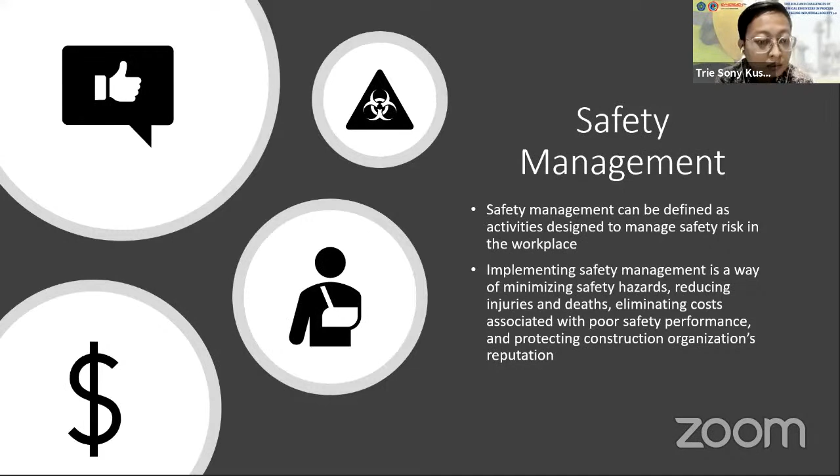Okay, I will show you data in Indonesia. This is the data of accident cases that happened in Indonesia in all kinds of industry in the last decade, from 2011 till 2020. As we can see here, almost every year there is an increase in accidents, except for 2016. An interesting fact is when the COVID-19 pandemic happened in 2020, a lot of industries were actually stopped or delayed for a while.

But as we can see here, the accident cases actually increased by a lot, more than 30,000 increases from 2019. This leads to a bigger question: what happens here? There is a probability that our safety management is lacking.

Next, let's talk about the contributors of accident cases that happen in Indonesia. The biggest contributor is actually the construction industry with 31.9%, followed by the manufacturing industry with 31.6%. This doesn't happen only in Indonesia, it also happens worldwide. Construction industry in a lot of other countries also becomes the biggest contributor of accident cases, even in developed countries such as the United Kingdom and the United States of America.

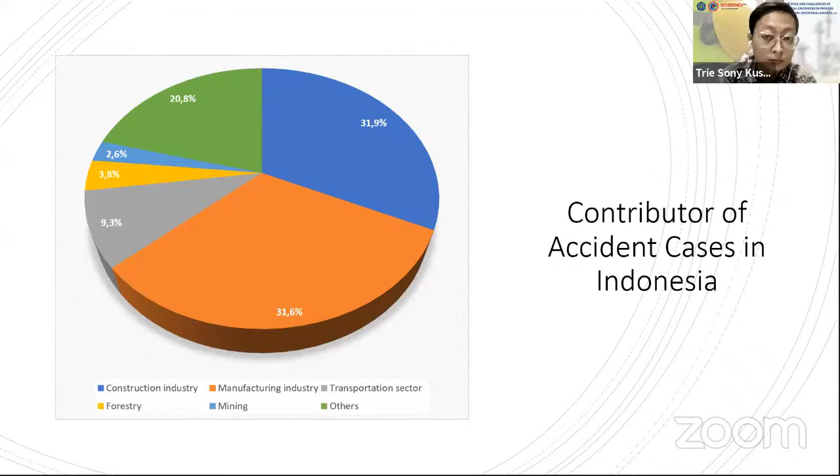This leads us to the biggest question: why does the construction industry become the biggest contributor of accident cases? Okay, why did this happen? Why does the construction industry become the biggest contributor of accidents?

The first reason is lack of knowledge about health, safety, and environment in the project workers' community. This usually happens to bottom-level workers like unskilled labor, but sometimes even skilled workers like engineers also don't have any knowledge about health, safety, and environment. Maybe they don't have any training or education about health, safety, and environment.

The second is lack of attention in current health and safety implementation. The top management, like the project manager, usually already has knowledge about safety management, but the problem is they don't give enough attention to it because they have other priorities such as productivity and profit. The third is unsafe work culture.

This happens a lot in developing countries such as Indonesia and many countries in Southeast Asia, the Middle East, Africa, and South America. For example, in some countries workers still think it is fine to not wear any safety equipment, such as a harness, when working in high places, and it becomes the norm there. They only wear safety equipment when there is a supervisor.

The last reason is lack of control on health, safety, and environment implementation. In construction projects, especially big ones, there usually will be a lot of workers, hundreds or even more, on the construction site. Because of that, it becomes harder to control or supervise each one of the workers.

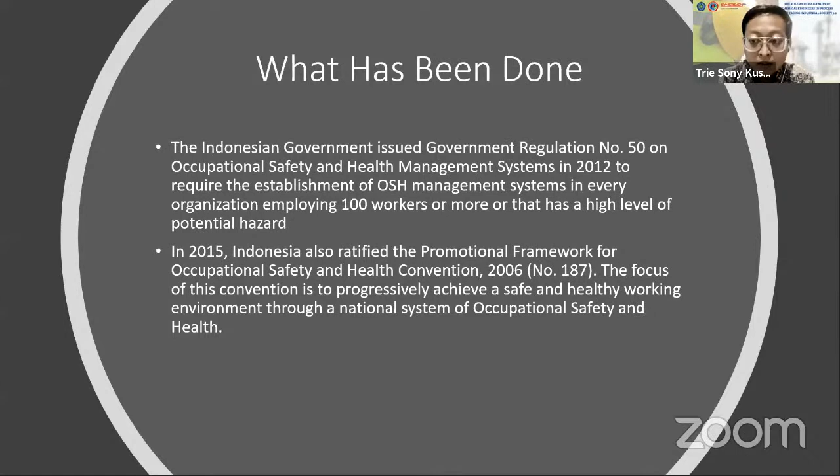Now we know that the government already tried to improve the safety of the construction industry, but the question is, does it work? Let's take a look back at the previous chart that I've shown you.

After the government issued the government law in 2012 and ratified the Occupational Safety and Health Convention in 2015, the number of accidents actually kept on increasing. It even became worse in 2018. This makes us question why it doesn't work.

The same strategy of making policies for occupational safety and health has actually been done in other countries, for example in Australia, and it led to a decrease in accident cases. So why doesn't it work here in Indonesia?

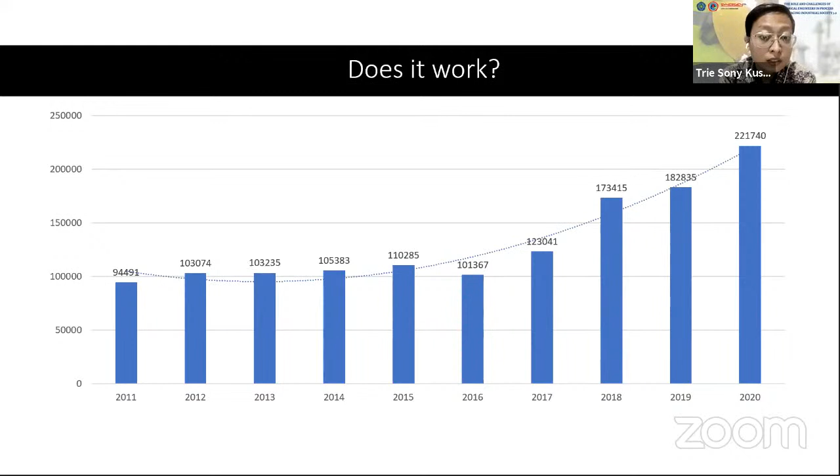The answer is about safety climate. A research study done in Indonesia shows that Indonesia actually has a lacking safety climate.

So I've been talking about safety climate, but what is safety climate? Safety climate contains three interrelated dimensions. The first is about the behavioral aspect, or what people do, which includes the safety-related activities, actions, and behaviors exhibited by the employees.

Second is about the situational aspect of the company, or what the organization has. It is reflected in the organization's policies, work procedures, management systems, control systems, and communication flows.

The third is about the psychological characteristics of the employees, or how people feel, corresponding to the values, attitudes, and perceptions of employees with regard to safety within an organization.

There are 6 key factors of safety climate. The first is management commitment. It's about whether the project manager considers the safety of employees as his or her top priority, or just some lip service to make the worker happy.

Second is about communication. Does the project manager socialize the health and safety program in a good way? Good communication will lead workers to pay attention to safety, but bad communication will make them ignorant of safety.

Third is about rules and procedures. Have the rules and procedures been made to improve the safety of the worker, and are the rules and procedures easy to understand by everyone, including the worker?

Okay, thank you. Hello everyone, good morning, hope all of you are doing great. Today I become one of the invited speakers. My department is mechanical engineering, and let me share my screen first. Okay, wait a minute. Okay, now you can see my screen.

The first time I saw this, there is a combination between chemical, mechanical, and also safety — three topics combined together. So in the beginning of the talk, what kind of specific topic can combine all of them? Then I thought of things we can find or meet in our daily life, such as automobiles, cooking on a stove, or even bigger industrial processes such as a furnace for melting metal, and other aspects like using fire as a common process.

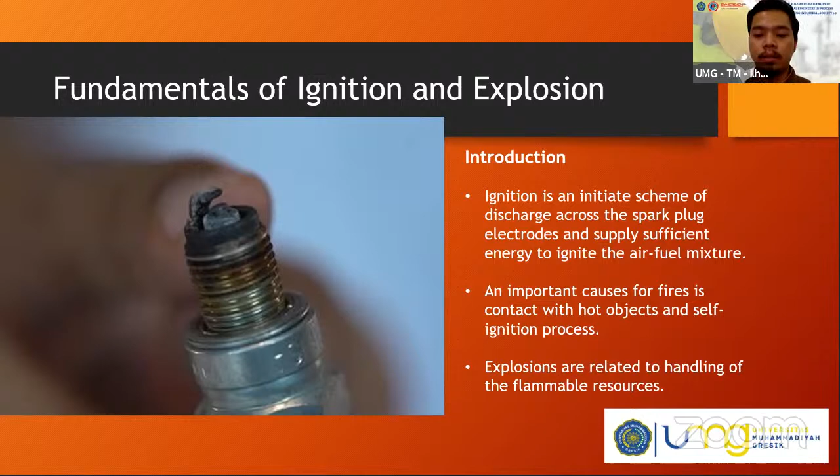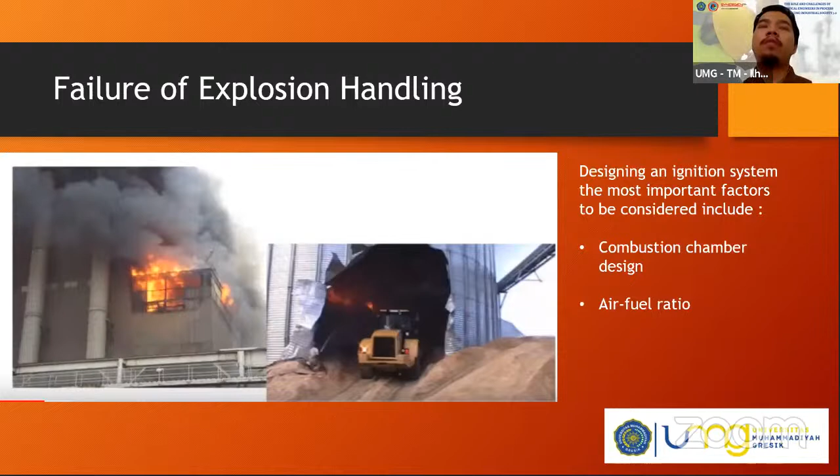Before going into the deep design, we have to know the background or small knowledge about fire itself. Fire can actually happen if there are three elements: heat, fuel, and oxygen.

But we also have to make sure there's a chemical chain reaction, because without a chemical reaction there will be no fire. For example, methanol or ethanol doesn't react with the air even with heat present, there will be no flame in reality. So we have to know there are 3 or 4 elements: heat, oxygen, fuel, and the chemical reaction.

The fire triangle was changed to a fire tetrahedron. Before it was a triangle, but now we know there is a new term: the chemical reaction. So we call it a tetrahedron to reflect these 4 elements: oxygen, sufficient heat to raise the material to its ignition temperature, fuel or combustible material, and last but not least, the subsequent exothermic chemical chain reaction in the material.

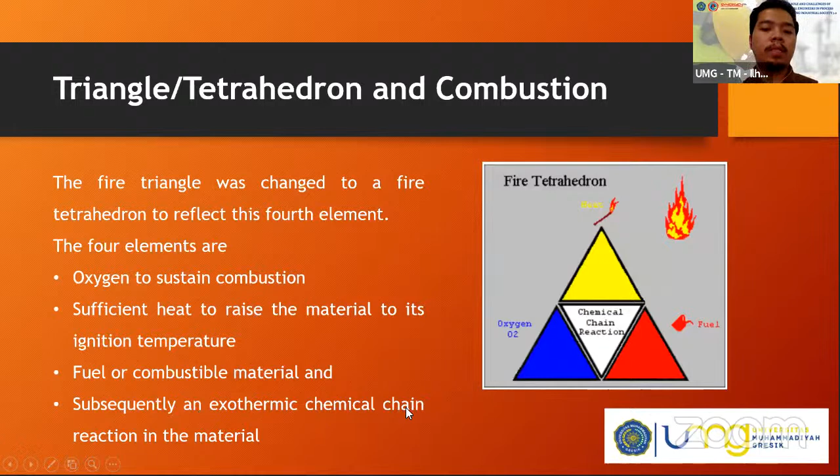These fire elements could be burned if they are in the same place, which we call the combustion chamber. In an automobile, there is a combustion chamber with a piston and crankshaft that is driven by the explosion of fuel and air.

The combustion process can be divided into 2 modes: the first is flaming, where there is a flame, and the second is non-flaming. This is like in the industrial metal field, where hot metal has a high temperature but is not burning. When it's hot, it becomes yellow or shines with a radiance, like yellow or red. This is non-flaming, but it can trigger a flame.

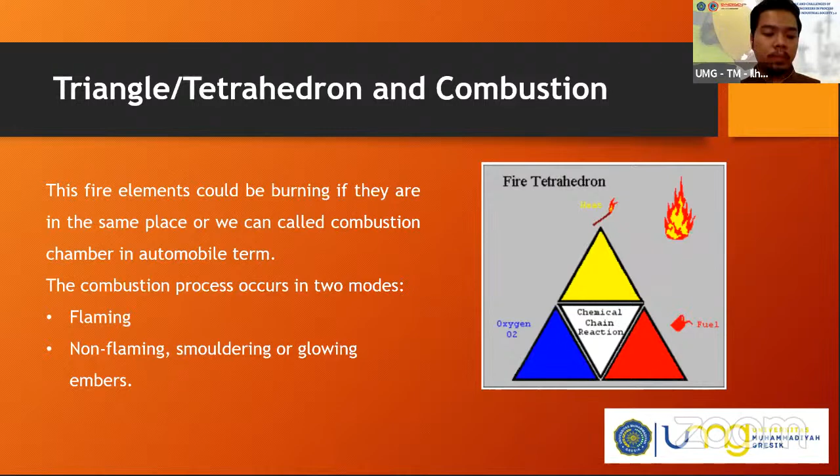We also have to know the term explosion. It's like a balloon - if you have met a balloon, you can find it everywhere. The balloon has pressure inside it. When we pump the balloon with air and break it, there will be a blow, or we can say it explodes, because there is a gap between the pressure inside the balloon and the pressure outside, or the environment.

So imagine if there's fire inside the balloon, or something like dust, or the pressure of hot air. It will grow if the heat rises. If the heat inside the combustion or the balloon is rising, the volume gets bigger and bigger, and then it will reach the ability limit of the thin layer of the balloon, which can then break.

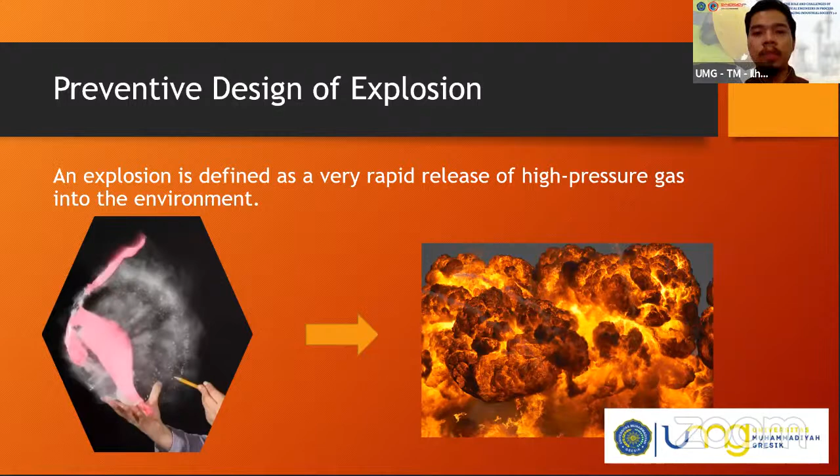So now we know the term explosion. What we can do after knowing the elements of fire is understand that if the fire rises up in a chamber and cannot compensate for the pressure inside, it will explode.

It's very easy to control the fire in the explosion. We have to maintain the four factors to become controllable, such as in the automobile, we have the carburetor. The carburetor itself separates both the air and the fuel, since air is the oxygen and the fuel is the fuel. They're separated into two areas, and after the suction of the piston, the air comes inside to the combustion chamber. Also, the carburetor itself can suck up the fuel by design of the venturi, a neck shape to make sure the fuel inside also sucks up together with the air. This is also a controllable unit.

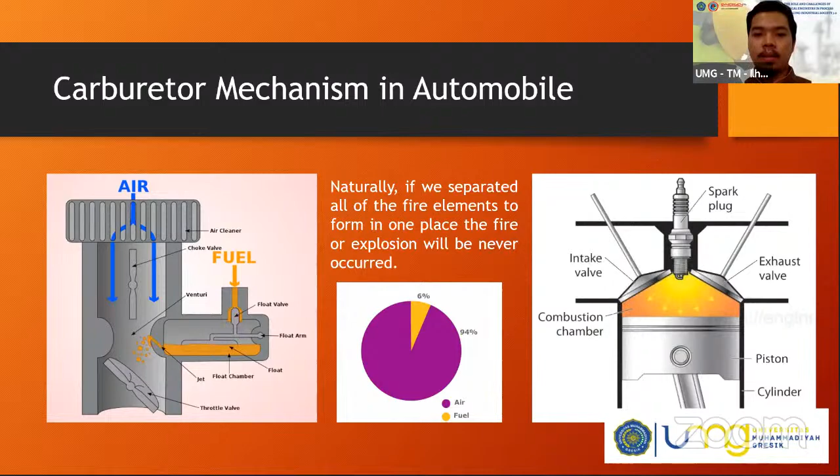So basically, we can design and control the fire. We can control the explosion by calculating the air, calculating the fuel, designing the shape of the chamber, and designing a lot of factors we can choose.

And finally, the LPG regulator also has the same strategy or design that makes sure there is no fire back from the stove to the LPG chamber.

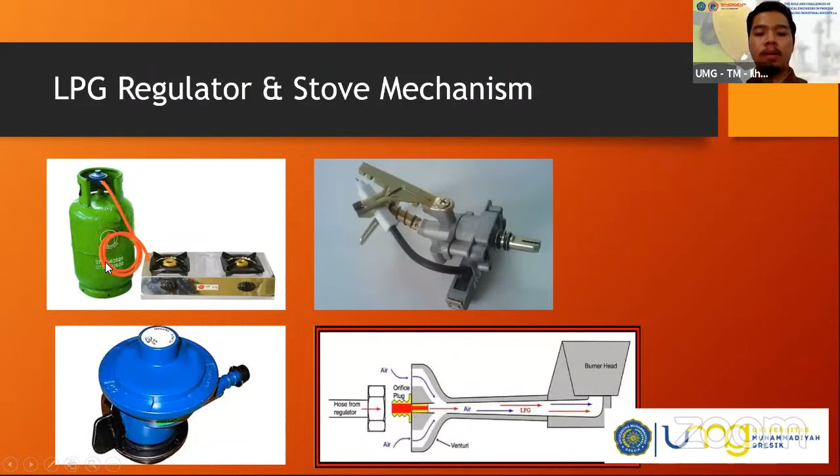So we finally come to the conclusion that both fire and explosion are basically hazardous phenomena. They can lead to catastrophic effects on the environment. Yet by correct handling, we can achieve benefits from them for our daily life. Preventive action could be done by designing the mechanism of handling fire and explosion, such as the carburetor or the regulator, which calculate the characteristics of the four elements of fire. Last but not least, extinguishing action could be done by a fire extinguisher to remove one or more elements of fire.

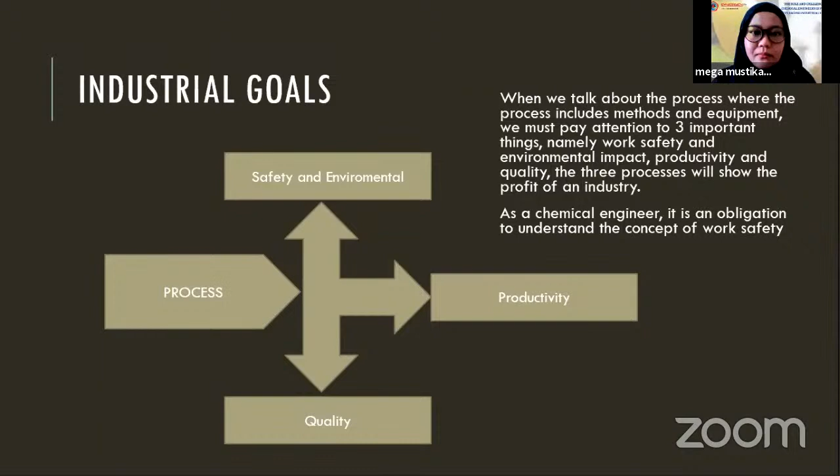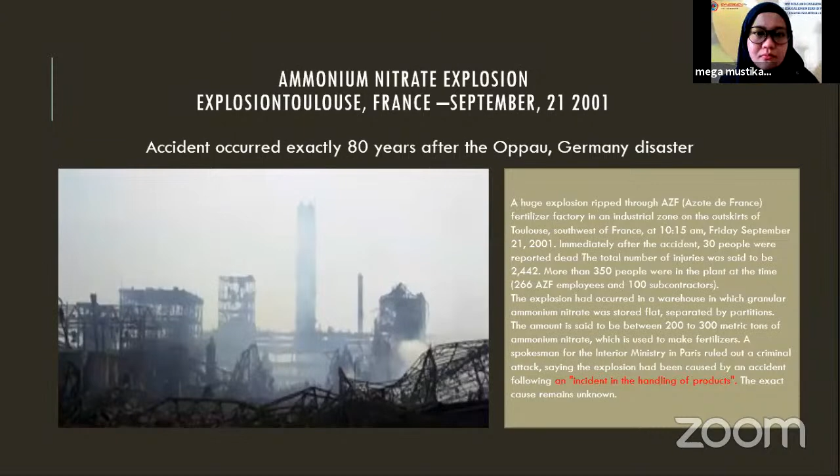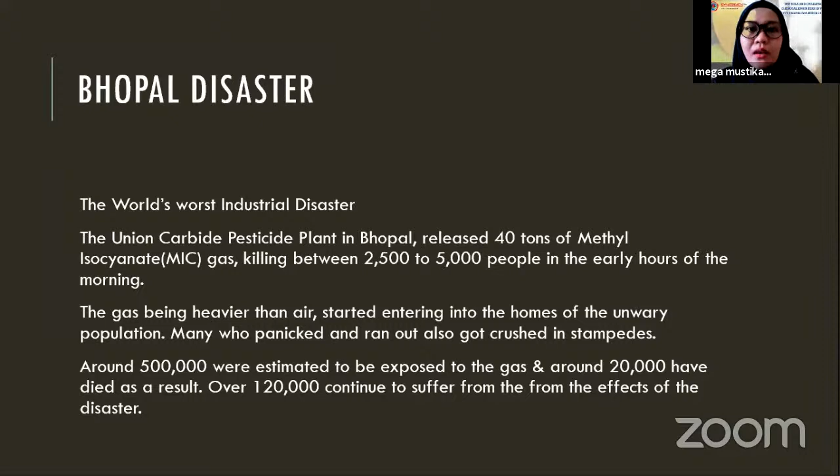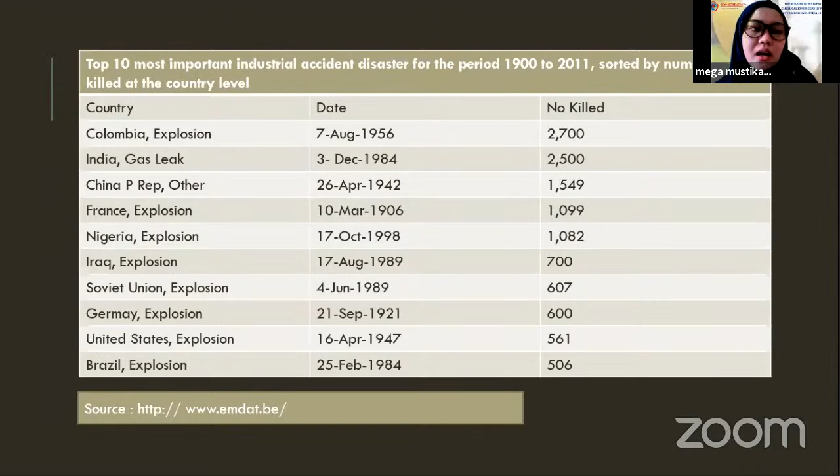As a chemical engineer, we must be observant to see the potential danger that may occur.

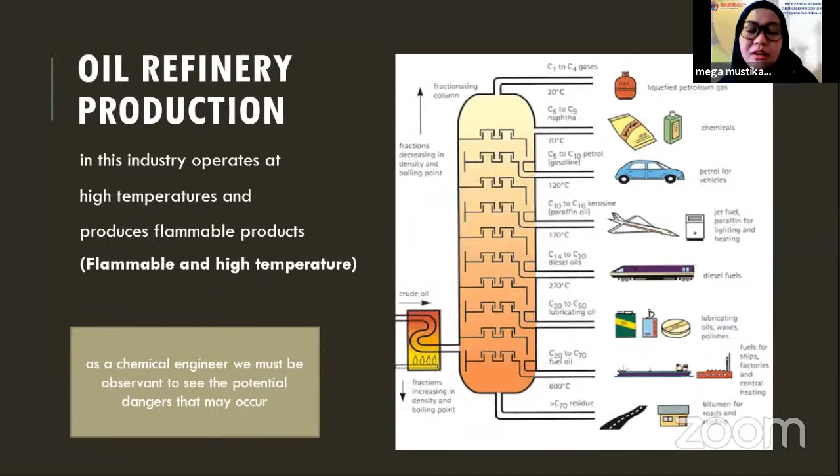For example, we have oil refinery production. This industry operates at high temperature and produces flammable products, so it is a flammable and high temperature industry. We also have ammonia and urea production, where there is a possibility of explosion caused by gas production and use at high temperature in the operating system.

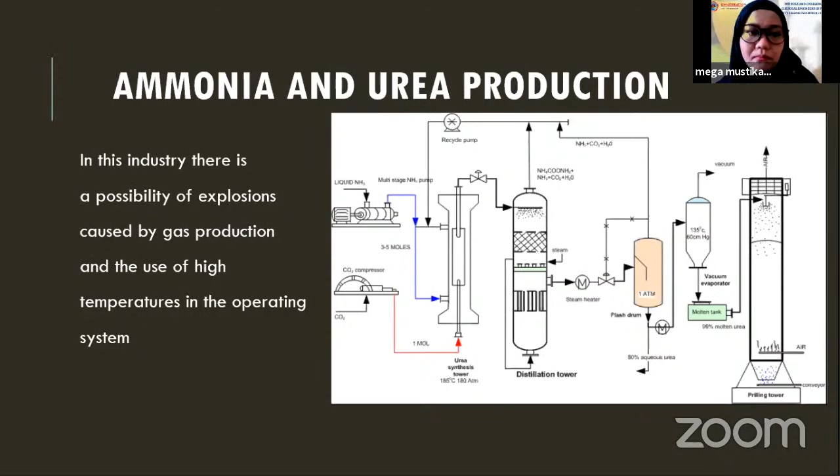So these are the potential hazards usually found in a chemical industry: first, chemical exposure, then poisoning by toxic material, fire and explosion due to flammable gas, fire and explosion due to flammable liquid and solid, explosion caused by pressurized gas and liquid, and fire and explosion due to uncontrolled reaction.

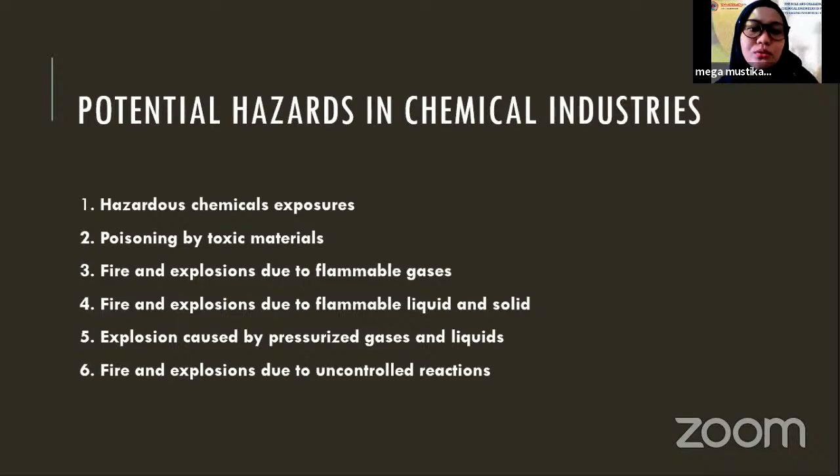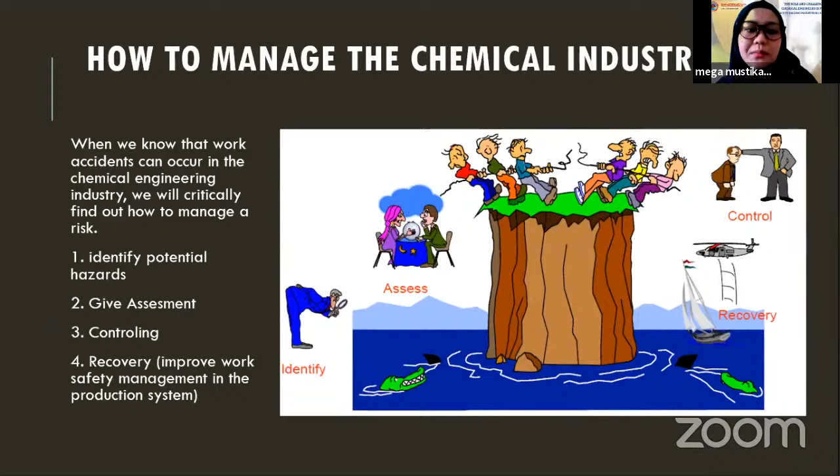So, to manage the chemical industry, when we know that work accidents can occur, we will critically find out how to manage the risk. First we must identify the potential hazard, then give an assessment of how the potential hazard may occur, then we must do controlling, and last we must do recovery. So we must improve work safety management in the production system.

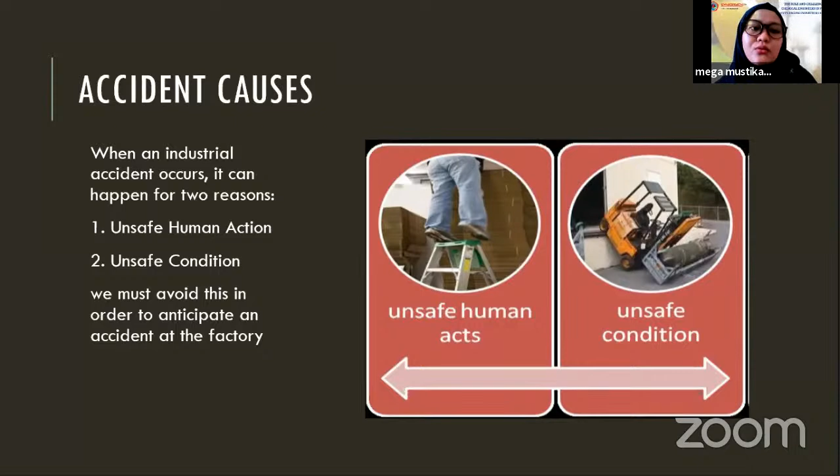Now this is the accident causes. When an industrial accident occurs, it can happen for two reasons usually: unsafe human action, and unsafe condition. We must avoid these in order to anticipate an accident at the factory.

So this is the accident sequence. What is the hazard? Hazard is a condition or action that has the potential for an unplanned release of or unwanted contact with an energy source that may result in harm or injury to people, property, or the environment.

Based on this picture, we can conclude that to avoid the accident that arises due to a hazard, we usually add a barrier to prevent an accident at work. For example, we have pressure or safety relief, a high temperature cut-off switch, or we do the correct and valid operating procedure.

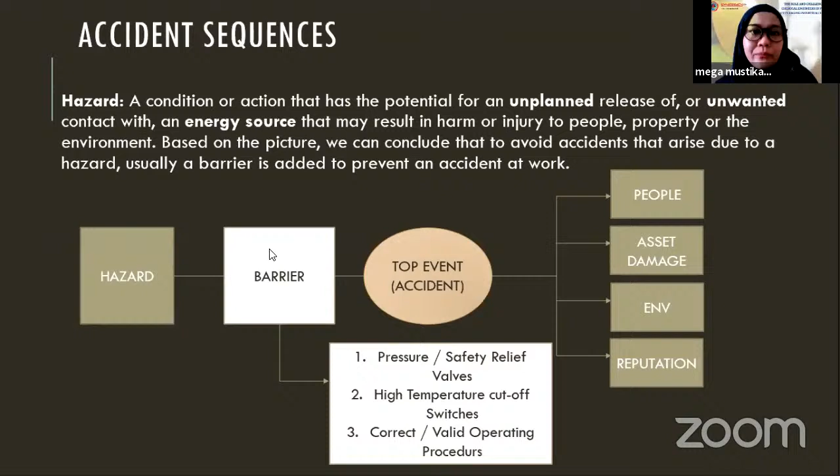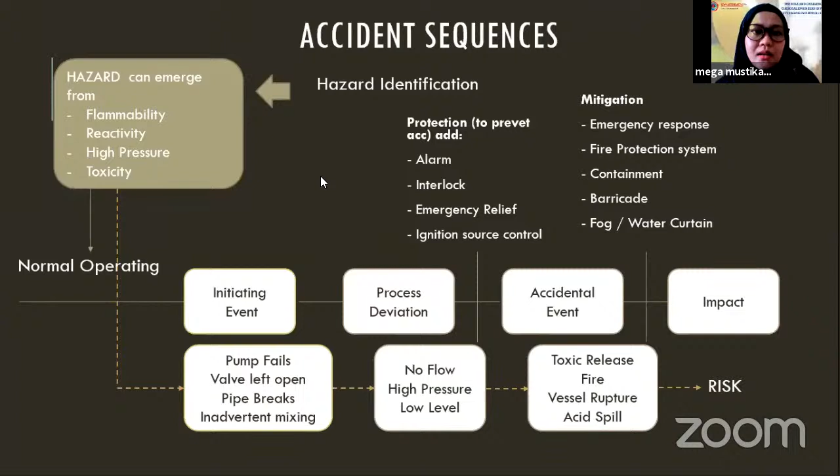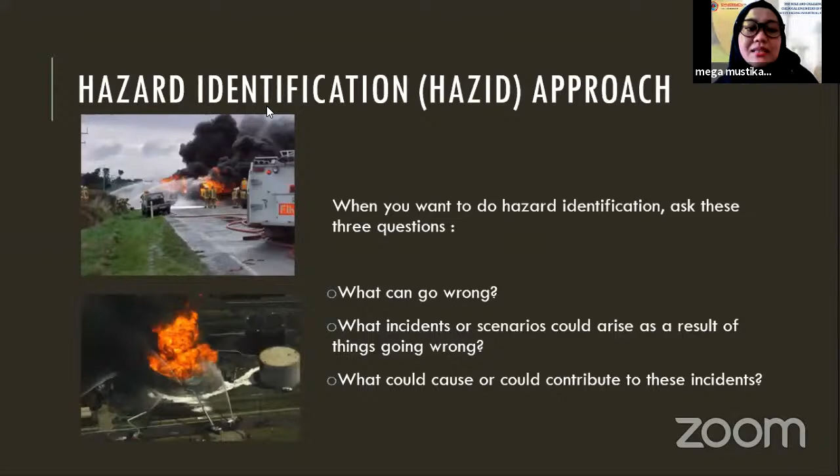We also have to consider the past, present, and future condition. For example, in the past or historical condition, we can ask what has gone wrong in the past, looking at historical records, process experiences, and near misses. For today or existing condition, we can ask what could go wrong currently, and we can do a hazard workshop, hazard study, scenario definition, or checklist.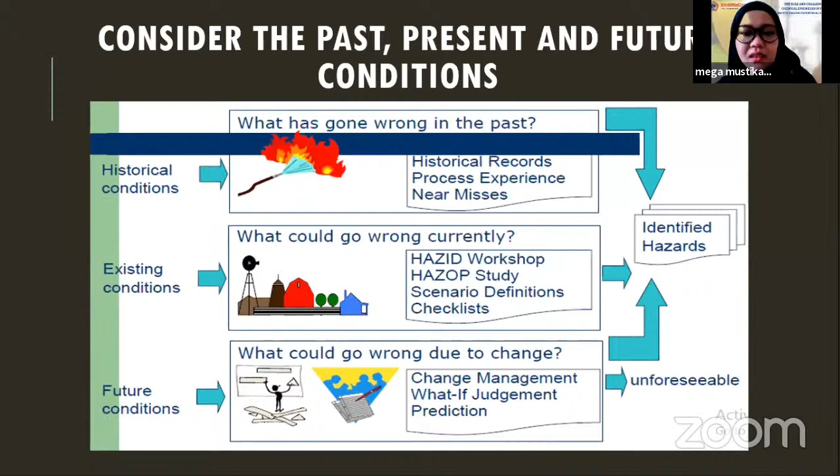And in a future condition, we can ask what could go wrong due to change. We can do change management, what-if analysis, judgment, or prediction of the accident that may occur.

This is an example of a checklist. A checklist is a set of questions to assist in hazard identification, where you check yes or no on a paper sheet, for example for a vessel or a pump. This is useful in early analysis to check within a project.

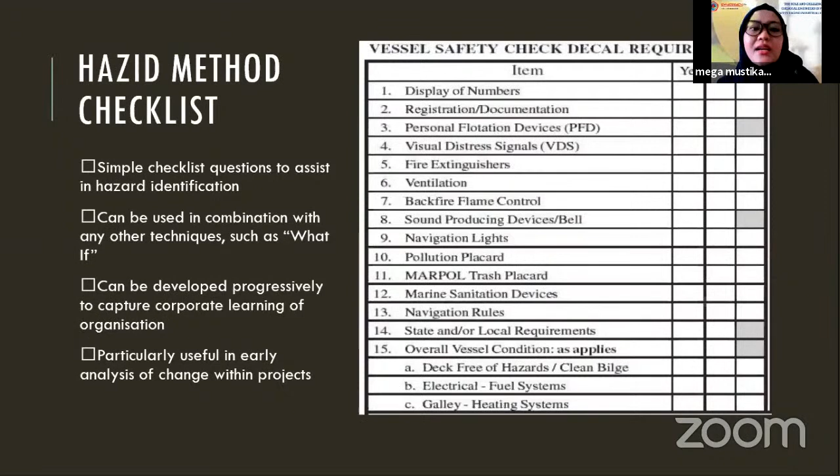Then we have what-if analysis. This is an early method to identify hazards, and it's a powerful method if the analysis staff is experienced. This is an example of the paper sheet.

For example, this is a what-if analysis for piping. We ask what if the piping leaks, then write down the consequences, the probability of occurrence, and the level of severity.

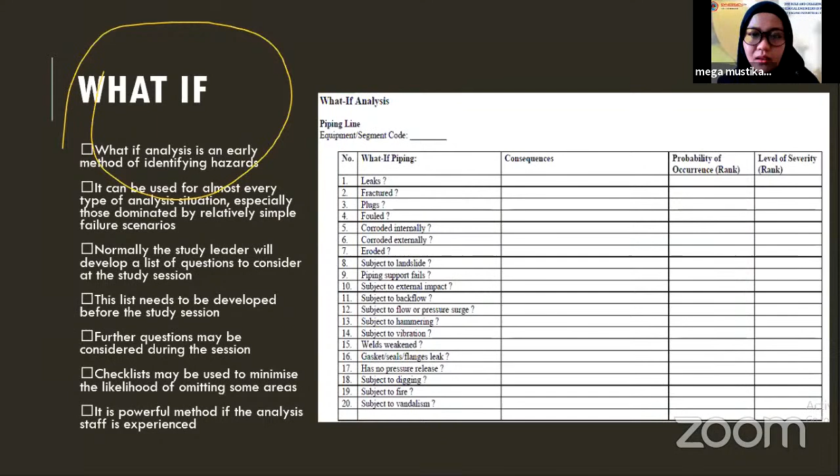And then this is the last FMEA. This is a systematic method in order to evaluate the ways the equipment can fail or be improperly operated, and the effect this failure can have.

So we have an example in a paper sheet. We can write down the component description. For example, we have a pressure safety valve, and then we can write what is the failure mode. Sometimes pressure safety valve have blocked or leakage or broken, and then we must write what is the effect, like for example over pressure, reaction runaway, etc. And we can have the conclusion.

So what is the safeguard? Like a periodic checking or good maintenance or good design, etc. And then we can also write how about the action, repair or replace, etc. You can do anything for your equipment.

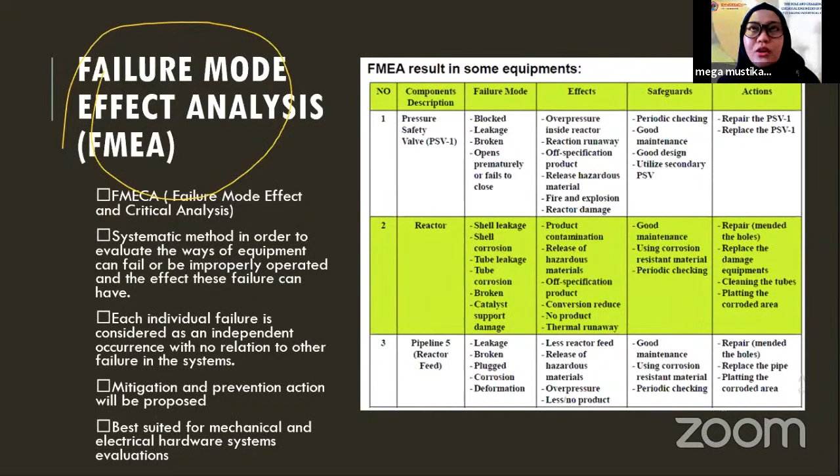In chemical engineering we also have the picture beside that shows the potential danger in various aspects, and this picture will make it easier to find potential hazards that may occur in various industrial tools. For example, in piping, we have high pressure we can find in the piping, and in lighting issues we have effect of radiation, etc.

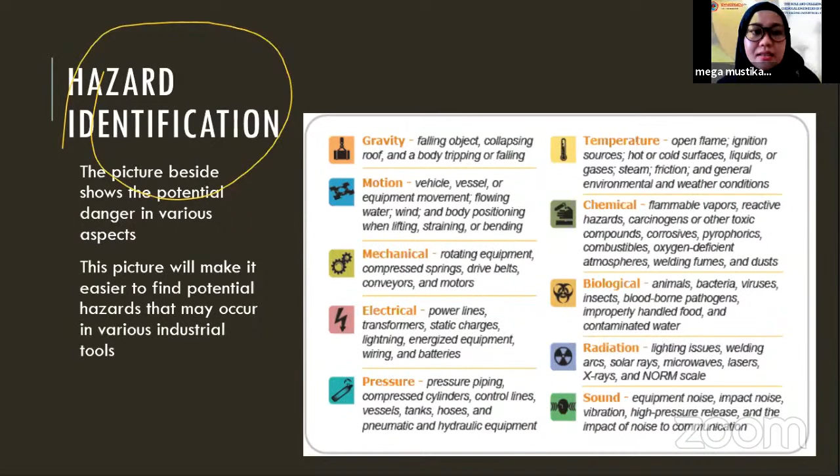In chemical engineering, we have a material safety data sheet or MSDS, and the MSDS provides information on appropriate procedure for handling, storing, and disposal of the chemical after use in laboratory or in factory.

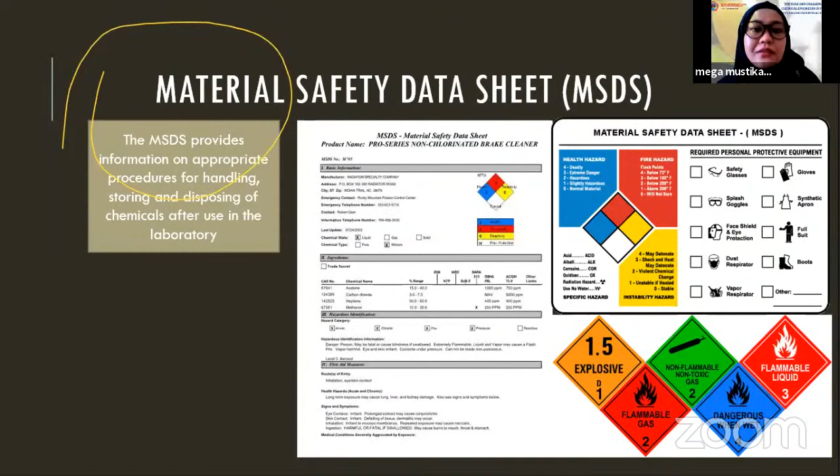And this is the figure of the PFD. So every tool operated in a factory is equipped with an instrument. In this figure, we can find the flow indicator control and other instruments like temperature control, level control, and pressure control, to measure certain parameters according to operating condition that must be monitored at all times to avoid the accident.

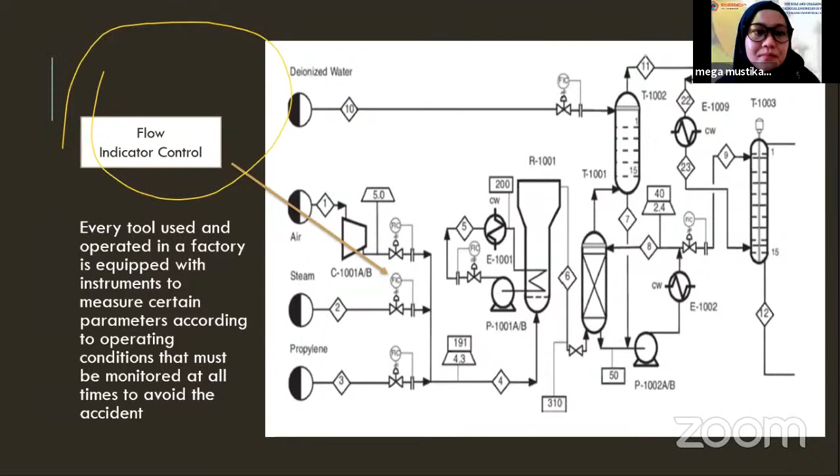And the second guard, we have a critical alarm, we have operator supervision or manual intervention. In the third, we have planned emergency response, and then we have the safety interlock system and emergency shutdown. In the fourth, we have physical protection like relief devices, and then we have dikes, and last we have the community emergency response.

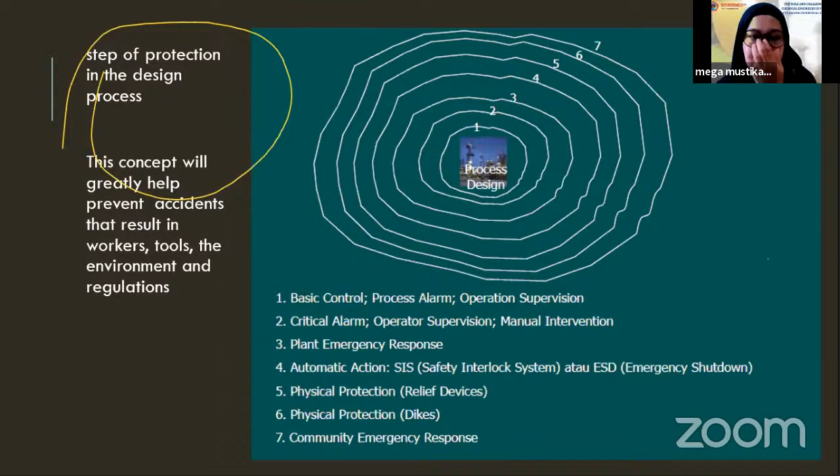And this concept will greatly help to prevent accidents that result in harm to workers, tools, and environment, and also relates to regulation. Okay, Mr. Hidayat, this is my last presentation. Thanks for your attention.

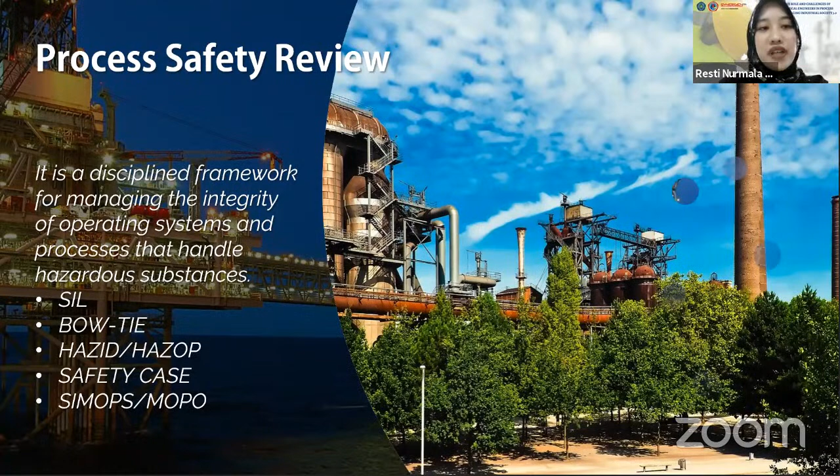Moving to the next slide, this is process safety review, one of the core services offered by Synergen OG. So what is process safety review? It's a discipline framework for managing the integrity of operating systems and processes that handle hazardous substances. In this study we usually conduct deliverables such as SIL, bow tie, HAZOP - the one Ibu Mega mentioned before - and safety case, SIMOPS or MOPO. There are a lot of studies I can't mention here because it would be too long, but this is one of the studies we conduct for process safety review for clients.

The next one is technical risk. This is one of the core services we offer, involving modeling and risk quantification techniques. When you work in technical risk, you deal with a lot of modeling using various software, along with calculations and engineering judgment. For instance, we have ship collision studies, explosion analysis, noise studies, QRA, and FERA.

Maybe some of the students in chemical engineering learned some of this, like FERA or QRA, or explosion studies, but it is actually much deeper compared to what we learned at university. Once you join this field, you can learn much more about what kind of studies we offer here.

The next one is loss prevention. Loss prevention is designing measures aimed at preventing or minimizing loss from hazardous activities. Industrial plants, both in oil and gas or chemicals, usually have hazardous substances, so we try to manage, eliminate, or minimize the risk exposed to employees or people surrounding the plant. Some studies we offer here include hazardous area classification, fire and gas detection layout, RAM study, and fire water system.

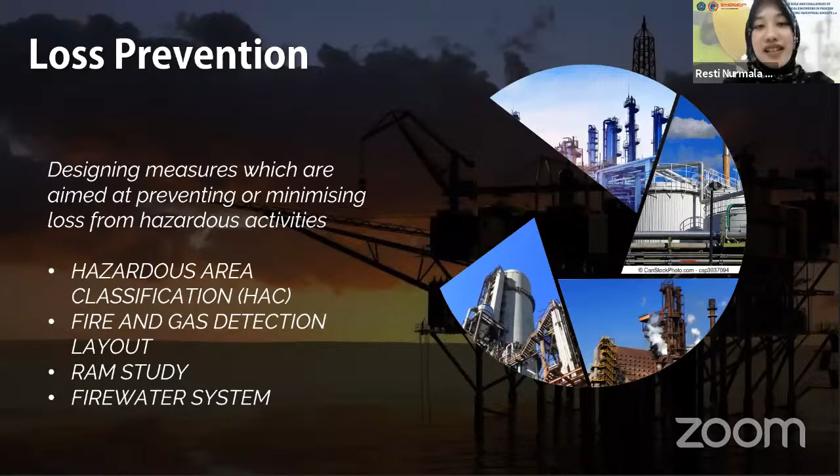Meanwhile, the last one is operational safety. This means we help the client manage and review change requests to enhance plant performance and safety, since when a plant is initially established, in the design or feasibility phase, it hasn't been constructed yet. So we also help compile and write documents that can properly serve them, meeting local or international regulations they need to obey. Some studies we do for operational safety include operational safety case development and management, and emergency response procedures.

So the next one is process safety engineering. What is process safety? Process safety focuses on preventing fire, explosion, or other accidental releases of dangerous materials or energy resulting in injury, loss of life, and environmental damage, which is the same as what Bapak Ilham and Bapak Sony mentioned before. There is always a risk of this happening in a platform or industry, so process safety has a role and responsibility to manage this so it does not occur.

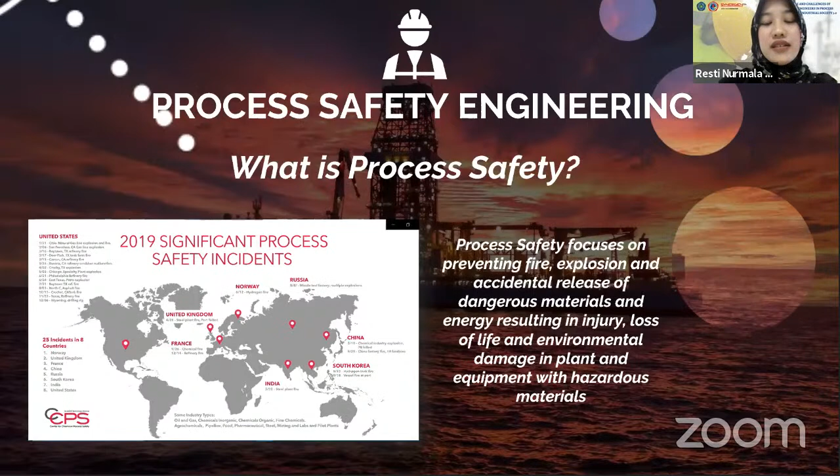This data is from CCPS, and we can see that in 2019 there were a lot of accidents happening in this world, especially in refinery, offshore, and onshore facilities. This is very bad if we cannot really overcome what's going on in the platform.

So what do we do as process safety engineers? First, we provide process technology support to operating plants so they can operate safely and soundly. Next, we ensure process engineering standards and processes are met across all development design, following regulations enacted by the government, both local and international. We also serve as a resource for technical staff in application, so we can manage loss of hazardous substances and try to stop accidents that can occur in the platform.

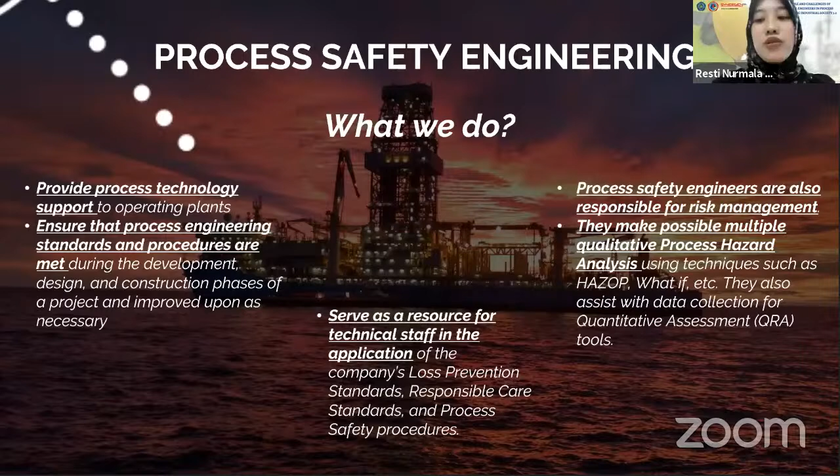Process safety engineers are also responsible for risk management, and they perform both qualitative and quantitative process hazard analysis. The qualitative part is like what Ibu Mega mentioned, such as HAZOP and HAZID. We also do trainings on this for clients.

For the students here, if you are someone who is always thinking about what's in life, always overthinking, and always imagining the worst scenarios that can happen in certain circumstances, I think process safety engineering is one of the best careers you can try, because we try to find out the worst case that can occur in our platform, and we try to find the best solution so that the incident or hazard can be removed or eliminated.

And then to be a process safety engineer, there are some requirements that you need to have. The first one is the education background, you need to have a chemical engineering background. And the next one, the skill required as a process safety engineer, you really need to have strong knowledge of the technical support, troubleshooting, and safety features of refinery equipment.

So maybe when we are in the university, we have limited knowledge given by the lecturers, but it doesn't mean that it stops you to learn more. There are a lot of open sources to study more about process safety engineering that you can try to browse or search on the internet. So you can try to find out what kind of studies and responsibility a process safety engineer has. Therefore, when you apply for this job, you are ready and the company can hire you with a good income.

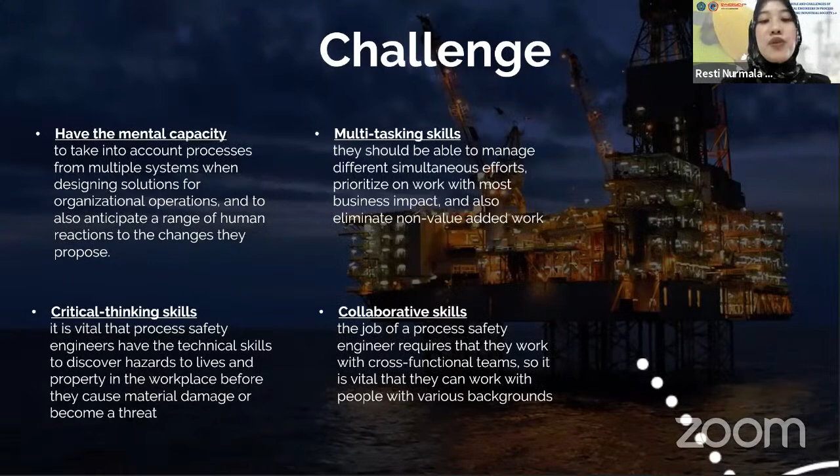Okay, and the next one is you have to have critical thinking skills, and then multitasking skills. And the last one is collaborative skills, because you will be working with a lot of people from mechanical engineering, or even electrical engineers, and so on.

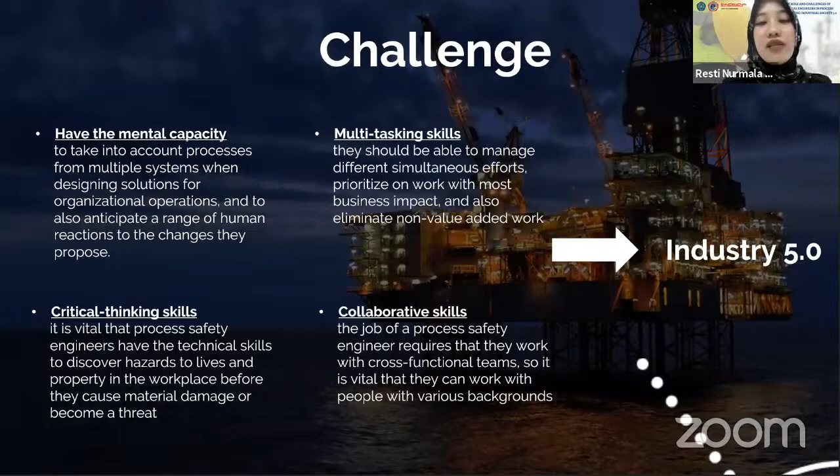And I think this is one of the challenges that we have in Industry 5.0, because in 5.0, it means that we want to really raise the awareness of the people themselves instead of just giving them the technology, but we also want to improve the knowledge of the importance of safety.

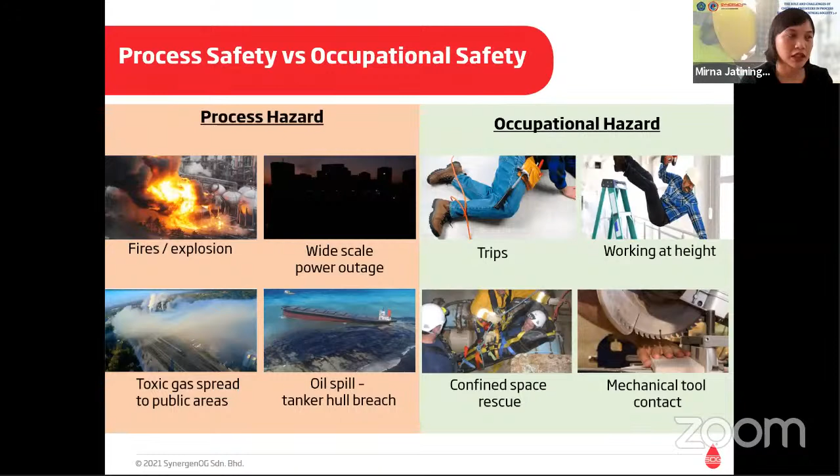Both process and occupational hazards are high in risk—process hazard because of the consequence, while occupational hazard because of the probability. Mr. Thomas will elaborate more on this later.

What are we doing in terms of process safety, and what is process safety? We summarize our main activity goals in 5 steps. First, we identify the hazard and risk of a facility, then evaluate the consequences, safeguards, and risk, and provide the appropriate layers of protection to prevent or mitigate incidents—introducing safeguards to protect, for example in a university, the students, staff, faculty, public, environment, and property.

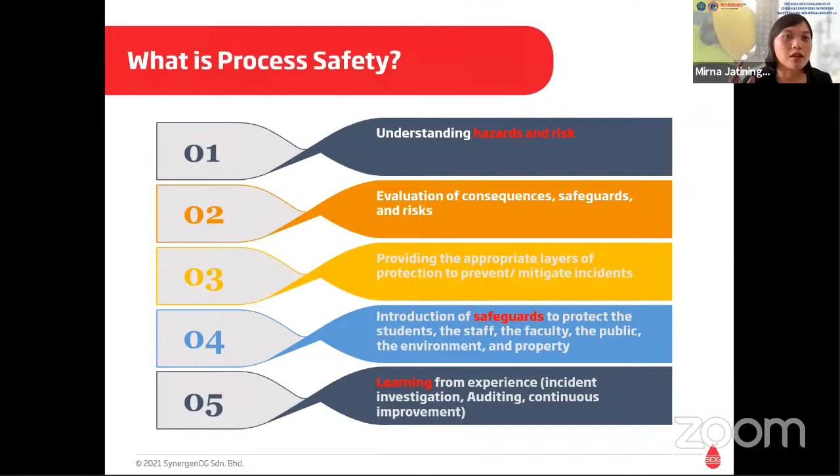We also learn from the past and from experience, through incident investigation if an incident has already happened, audits, and continuous improvement. That is typically the main goal of process safety activity. So what is the importance of process safety? It is unlikely to happen, but it has a massive impact—that's why we need process safety.

First, we want to align this with our topic today, Society 5.0. Process safety plays a very big role in increasing safety for the workforce. We design a safe system in terms of process, and the most important element of the process is the human factor—so we try to shift awareness and understanding about safety culture.

The second reason is to prevent human injury, which is of course a very important goal. Process safety also prevents significant losses and environmental damage.

If you remember the process safety event of the leak in Balikpapan—the Pertamina pipeline leak in Balikpapan Strait—how many innocent people became victims of that incident? Not only did they lose their lives, they also lost their livelihoods, because they could no longer go fishing; the water was polluted. If you've heard the news, there were huge losses in terms of numbers, maybe billions of rupiah, and the real indirect costs may be 10 or 100 times that. This is what we try to avoid, along with preventing major disasters from happening.

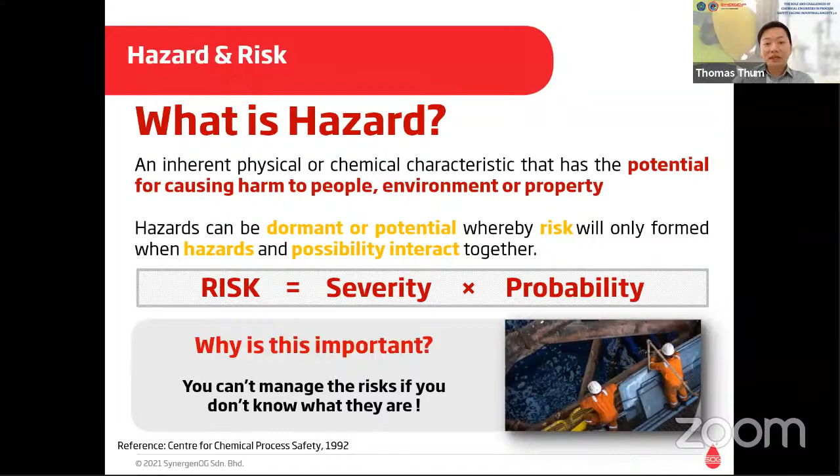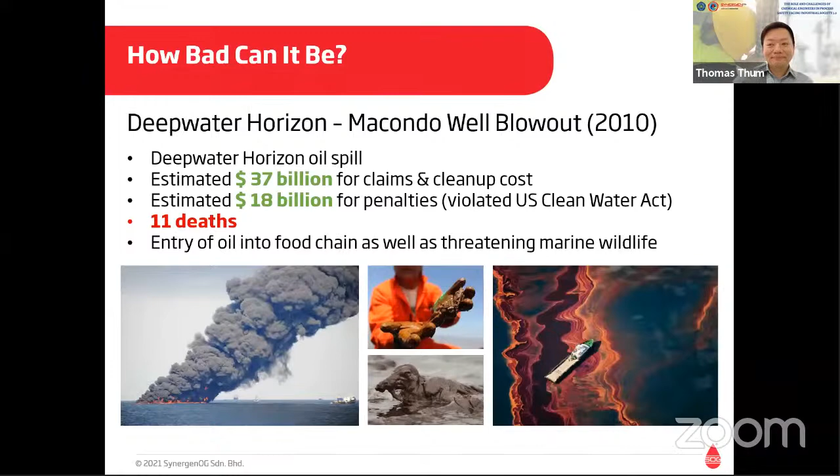The most effective way to control hazards is, of course, to eliminate hazards if we can. For example, design process areas far from manned areas. However, if elimination is not possible, we may move to prevention, followed by control, mitigation, before resorting to the last and least effective control, that is emergency response.

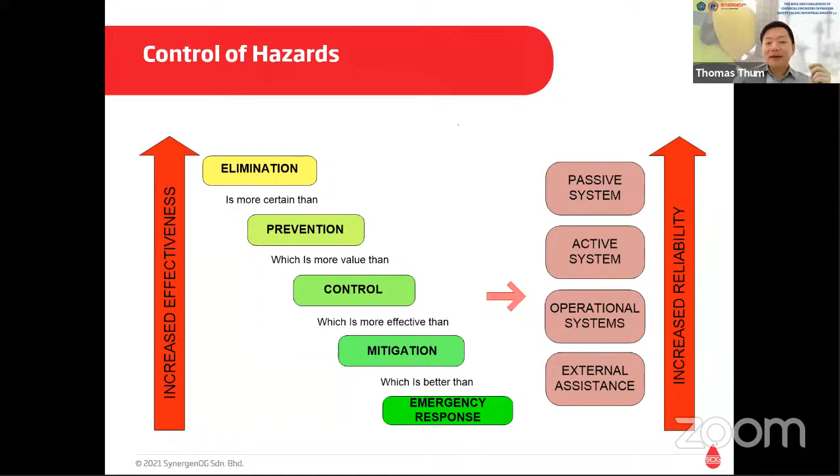Please. Let's look at this example of a well where it is needed to extract oil or gas from the seabed or ground. Without a well, we cannot get any oil or gas. Hence, we cannot eliminate the hazard of this operation.

However, we can prevent hazard from turning into an unwanted event by ensuring that the well Christmas tree design has been catered for high integrity and reduced chance of leaks.

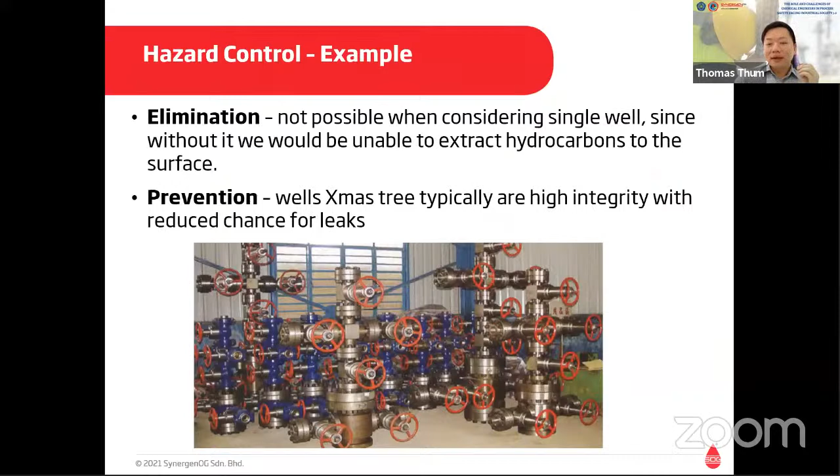In addition, if a permit to work system was available, access to the wellhead area will be limited to relevant personnel. This will also ensure that personnel follow safe operating procedure, or SOP, during all activity.

If we take the examples presented by Pak Ilham earlier, if they were designed to control ignition, if there is any release, there will not be any source that will ignite the release of the flammable hazards. Hence, if there is no ignition, there is no fire, no explosion.

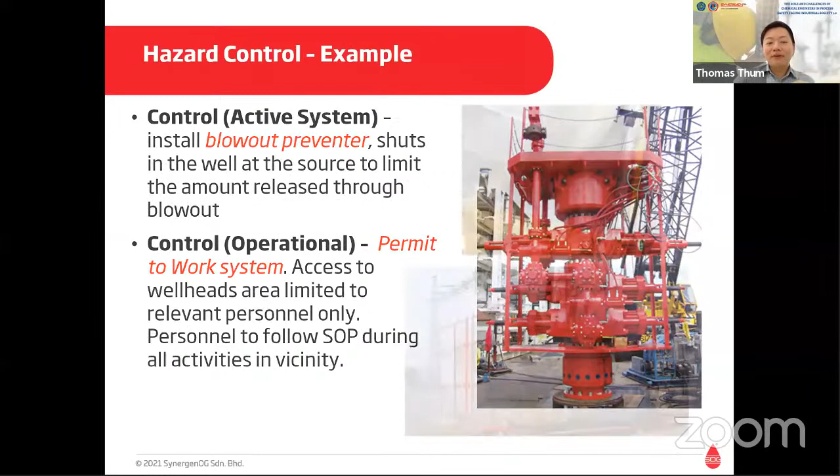If a fire event were realized, fireproofing such as coating applied to surrounding structure will act as mitigation to prevent escalation of the event. Fireproofing is also known as a passive system.

In addition, if there were fire deluge provided as an active fire protection system, this will cool down surrounding equipment or structure to delay fire from spreading.

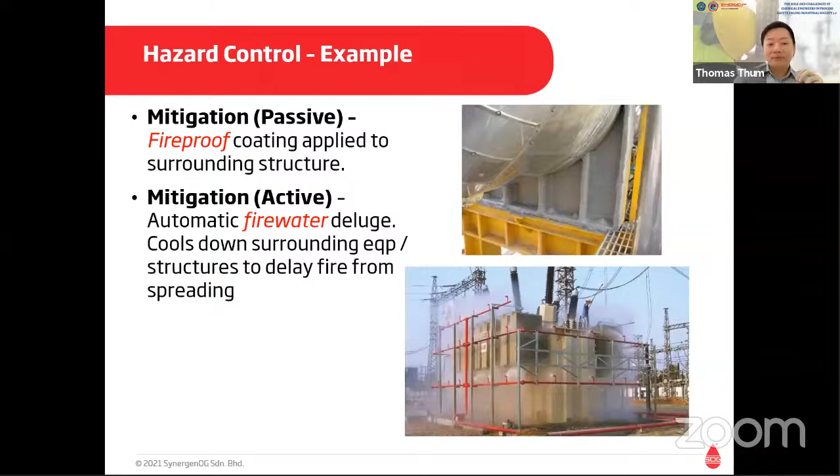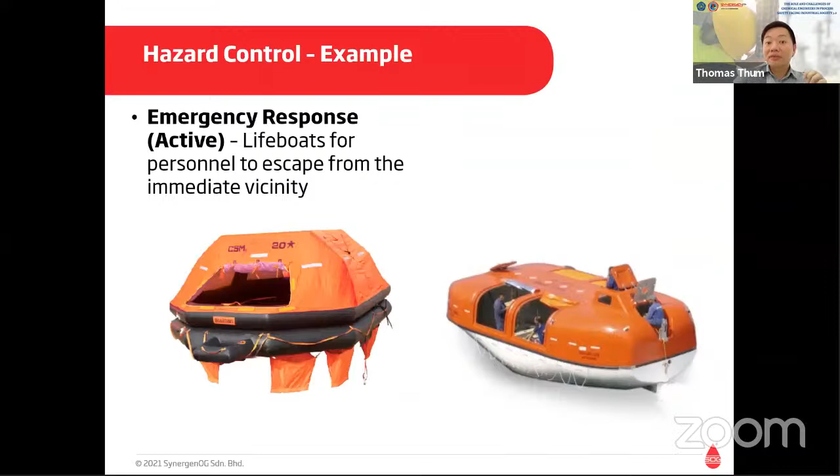For an offshore facility, lifeboats are provided for personnel to escape from the vicinity during a major accident event as part of the emergency response activity. Other escape, evacuation, and rescue support systems include escape routes, muster point, marine vessels, life raft, embarkation ladders, life jackets, and life buoy.

This concludes the summary of hazard control examples. Therefore, as a process safety engineer, being able to identify and control hazards is definitely one of our job scopes.

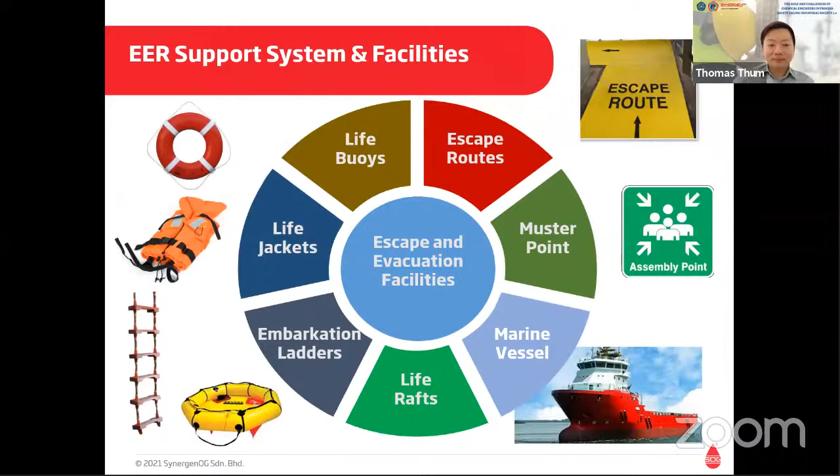For detailed analysis, to determine the risk level of personnel exposure, a detailed quantitative risk assessment may be conducted, and the outcome will be justified as acceptable in meeting the ALARP principle, or as low as reasonably practicable.

Finally, these outcomes will be compiled as part of the safety case, which acts like a book that consists of information such as hazards present in a facility, and how the hazards are controlled. The safety case could be part of a requirement by the regulatory body before a facility can operate.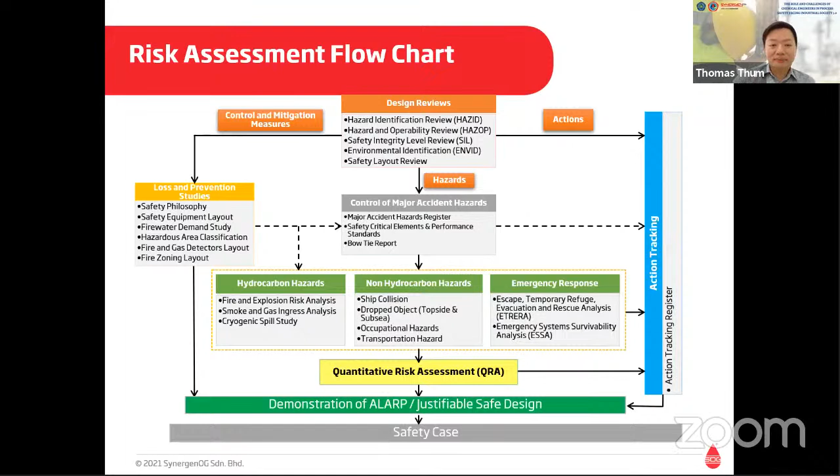To conclude my presentation for today, I will end my explanation with what we meant by ALARP in previous slides, based on the UK HSE framework. As a process safety engineer, ALARP is a common term that you will come across in process safety.

In short, if the calculated risk is in the green region, the risk level of a facility is considered acceptable. If the risk level falls under the ALARP region, or yellow region, the risk is only tolerable if risk reduction is impracticable to implement.

On the other hand, if the risk value of a facility falls into the red region, known as the unacceptable region, risk reduction is compulsory to reduce the risk to the ALARP or acceptable region. These regions are bounded by criteria, and sometimes this could differ by organization if no criteria were adopted based on any regulation or standards. With this, I would like to pass the remaining presentation to my colleague Mirna.

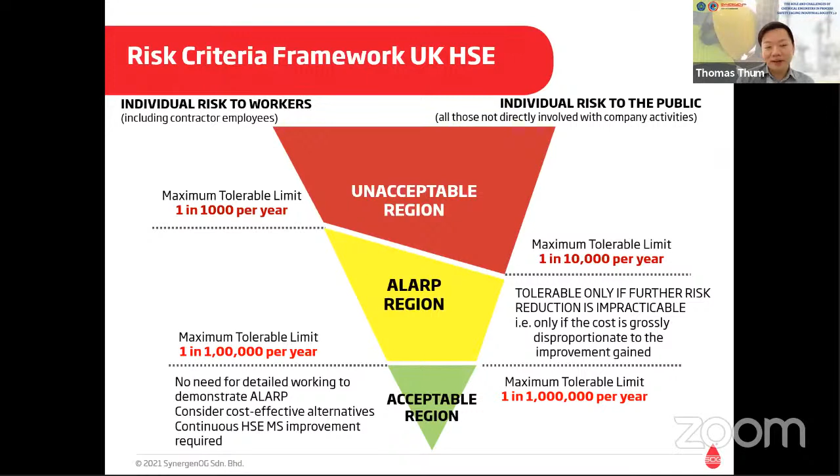Thank you, Pak Thomas. So what was just explained by Pak Thomas is actually the typical work that we normally do in our day-to-day job. So what are the challenges in the process safety field?

Because, as mentioned earlier, process safety deals with low probability events, it tends to fly under the radar. It's not detected until things go horribly wrong, which means it can have a very massive impact. Before that, maybe it's not detected.

The second challenge is that it's sometimes difficult to enforce safety standards because, as mentioned earlier by the speakers, process safety provides no direct productivity towards the company's financial gain. So it sometimes has no direct impact. For example, you put up a blast wall, which is expensive, but the explosion does not happen, which is what we want. But if it must happen, the blast wall will not give you a direct impact on your financial productivity.

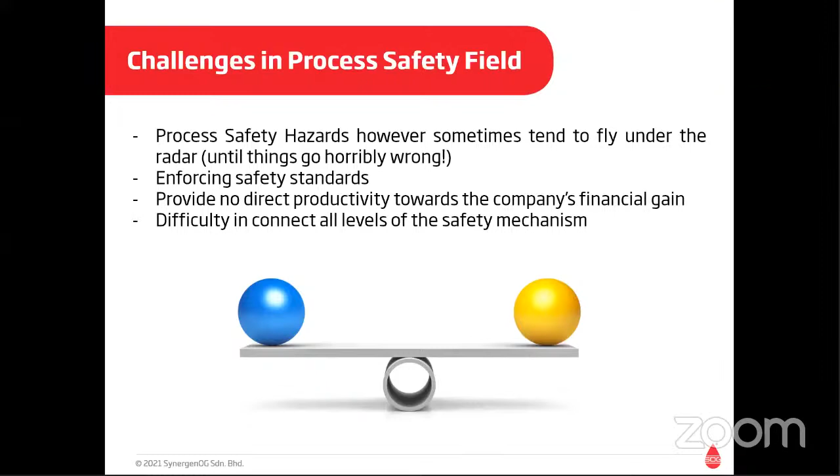What are the career opportunities and possible roles in process safety? We can work in oil and gas industry, renewable energy, or any manufacturer or industrial company. The roles can include being an operator directly operating the plants, working in consultancy like us, technical authority, insurance, and so on. The responsibility can be towards the people, facility, asset, environment, and planet. So you students are important stakeholders for ESG for your future employers.

As for career, when you learn chemical engineering or process engineering, you can do your postgraduate and become a researcher, or take a professional certification like PPSE, Professional Process Safety Engineer, and become a professional workshop facilitator. In a HAZOP and similar workshops, we need a facilitator to guide and lead you. Operators are the subject matter experts in the facility, but a professional workshop facilitator is still needed. Or you can be a lecturer like our ex-colleague, or advisory for government and institutions. If you like IT things, you can do digital tools development. You can also be an engineer like production, process, environmental, field, or project engineer, etc.

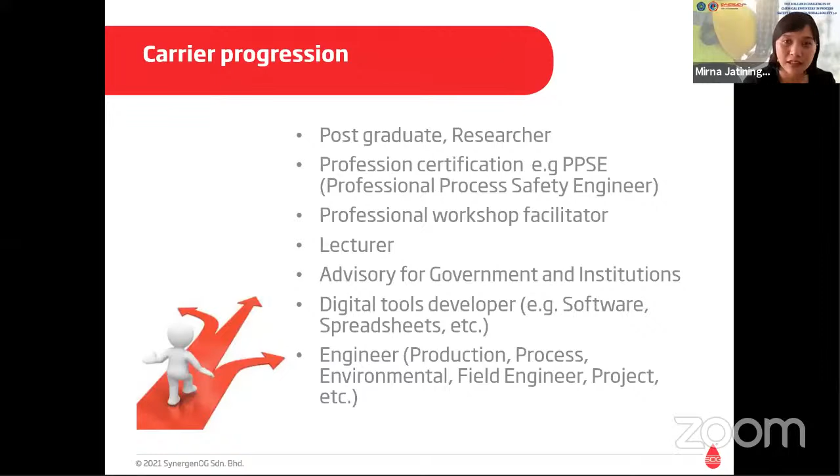So this is a little word of advice. When you are still learning, you have to understand and master your fundamentals as a process engineer. You have to know about mass balance, unit conversion, reading the PFD and P&ID, because sometimes in industry we still meet process engineers who cannot really read the PFD or P&IDs because they were not exposed to it enough during university.

And the second one, you have to focus on your soft skills on top of the hard skills. You must have passion to do the right things, but sometimes you have to make a difficult decision as well. You have to be willing to explore and take challenges as a learning journey. In process safety, especially in consultancy like us, I would say that we are paid to learn. So it is very interesting.